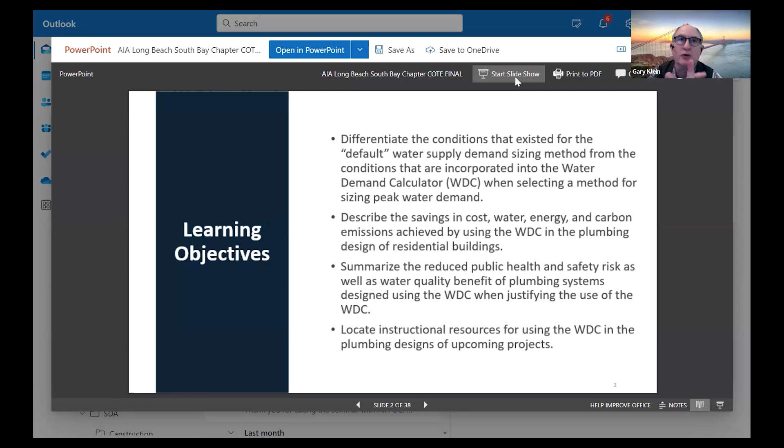Okay. So we're going to cover these topics with particular attention being paid to one exemplary project. We're going to cover the overview and problems with the existing methods in the Hunter's curve. We're going to look at the water demand calculator. We're going to talk about the benefits, and we're going to talk about codes and standards and future collaboration opportunities.

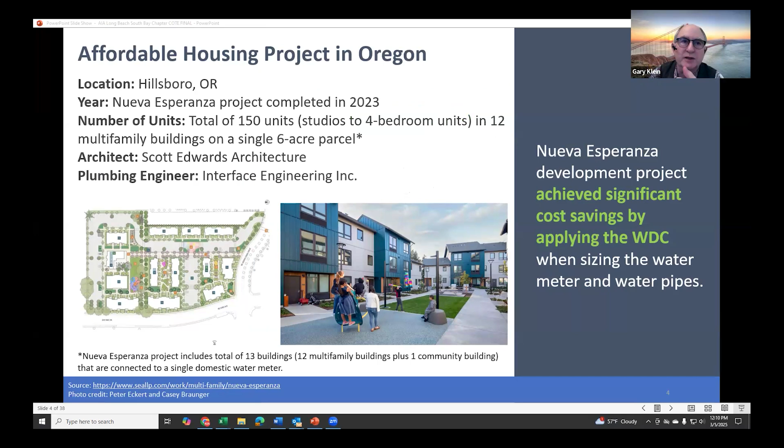This is an affordable housing project in Oregon. It's called Nueva Esperanza, and it achieves significant cost savings by applying the water demand calculator when right-sizing the meter and the water pipes, particularly the mains between the buildings. It's a garden apartment complex. So there were system development charges, as we're all familiar with here. They have similar ones in Oregon. And they were told they were going to need to use a 4-inch water meter based on normal calculations for the sizing of the water demand in the building.

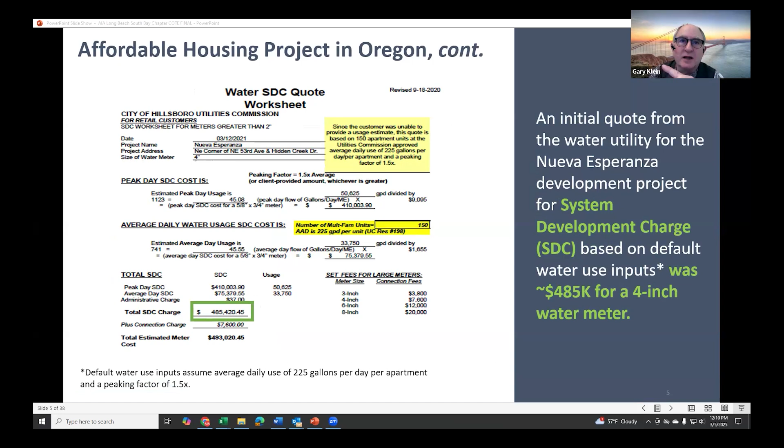So about $480,000. They came back with a 2-inch meter size and a 2-inch pipe. So their system development charges went down by $400,000 just by virtue of using the water demand calculator to give a better estimate of peak flow and therefore pipe size. That's a savings of $2,600 per apartment unit. I'd say that helps make affordable housing more affordable. What about you? It's a pretty big deal. This is a huge one. We haven't even got to the piping in the buildings. This is just at the system development charge level.

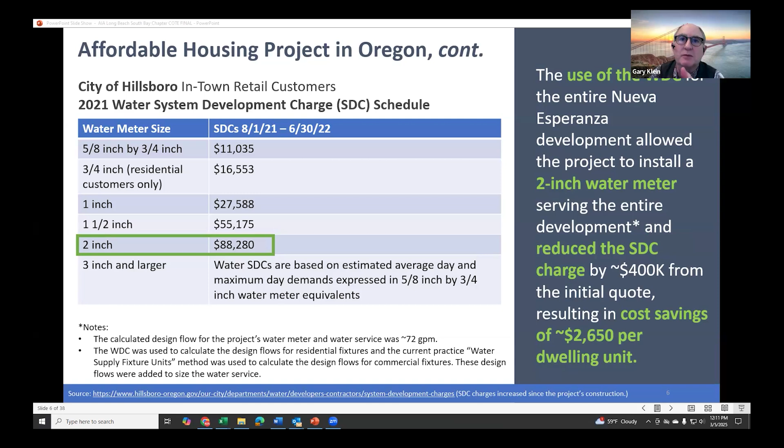So let's talk about the problems, the overview. Sizing plumbing is undergoing a major transformation. I've been working on this topic for almost 10 years now as part of my work with the Water Efficiency Standard Task Group that's formed by IAPMO. And about a decade ago, no, 15 years ago now, we received a proposal to say we ought to bring the sizing of water piping into the modern era.

The methods we use were written down in 1940 by a fellow named Roy Hunter. Some of you may know that name. He used to work with the National Bureau of Standards, which we now call NIST. And the method of sizing has not been fundamentally changed since 1940 when he published it, even though if you read his documents, he said, we really need to fix this as we get more information moving forward.

Well, in the 1990s, the federal government changed fixture flow rates for faucets and showers and toilets and urinals, and nothing flushes or flows at the rates it did back in 1940, nor are our patterns of use the same. And if you read the 4th bullet, the flow rates from the 1940s assume that every home operates like a sports stadium at halftime with people waiting in line to use the toilets and the sinks. And I'm going to suggest that doesn't happen very often anymore.

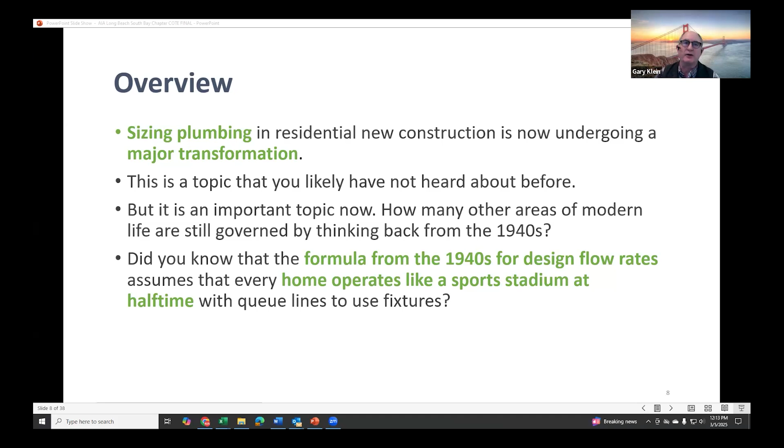And so we have lower flow rates and different patterns of use. We really ought to start looking at right-sizing the plumbing based on modern information. So reducing the volume of the water in the building's piping has many benefits. You can think of several.

There's water savings potential, particularly on the hot side. There's energy saving because you don't waste as much water waiting for hot water to arrive or when the pipes cool down. You get carbon savings in first costs and operational costs, and you get cost savings in first and operational costs too. All of these sound like a pretty good deal from a construction point of view.

So the key to remember is that volume is a combination of distance and diameter. Architects are responsible for the distance between the mechanical room and the wet rooms. The plumbing professionals have no choice but to connect the things so they don't leak. The closer we can put things together, better stacking and back-to-backing reduces the number of feet of pipe, which reduces the volume of the pipe. Reducing the volume is where all the benefits come from.

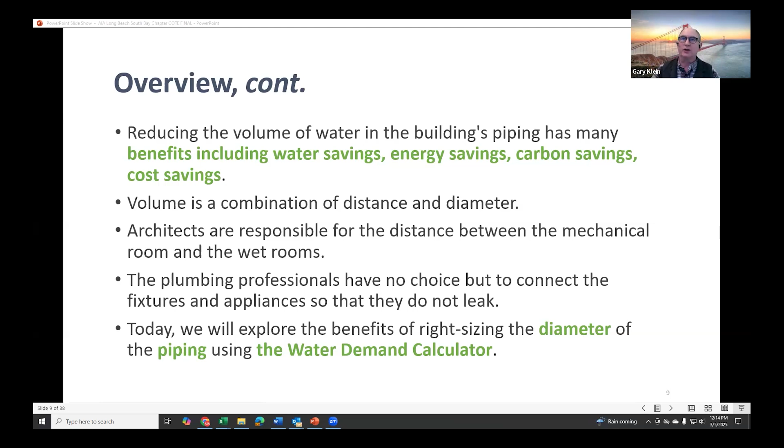So how can we reduce the diameter and still provide a margin of safety? Because we really don't know exactly how much water gets used, hot or cold, in a building in any given minute of time. This is an overview of water use over time, showing that from 1980 to 2023, there's a 50 to 75% reduction in water use for the typical residential fixtures or appliances that we see in our buildings. And the probability of simultaneous use is much, much less than we would estimate.

So I'm going to ask a question that I'd like you to answer in the chat if you can. Imagine you have a hotel with 100 rooms in it. How many showers do you think are on at the same time on their peakiest day of their year? That means every room is fully occupied. I see an answer of 12. Anybody else want to guess? I see 50. I see 40. I see 80. Cool. All over the map.

So it turns out from measured data, it's between 10 and 15 showers are on at the same time on the busiest hour of the busiest day of their year. That's 2 hotels for almost 2 years worth of data. It's not an infinite number, but boy, it's a big data set. The plumbing code assumes 80%. It doesn't happen. There's no evidence that that happens in most cases. We can create a few cases like stadiums and flushing at halftime. That's a different case, but it is not the normal case for most buildings.

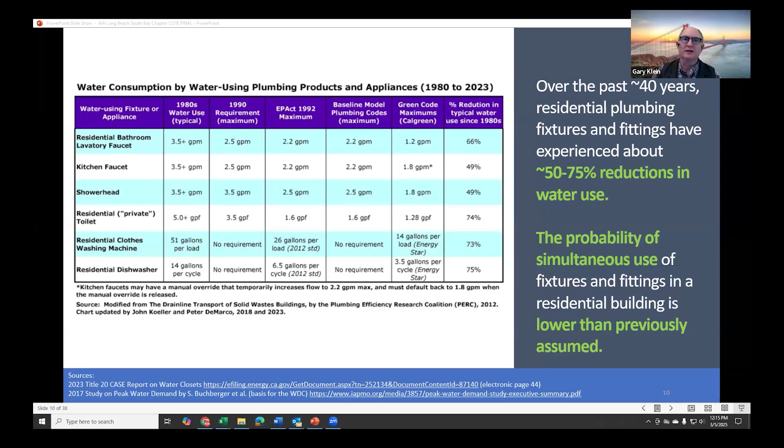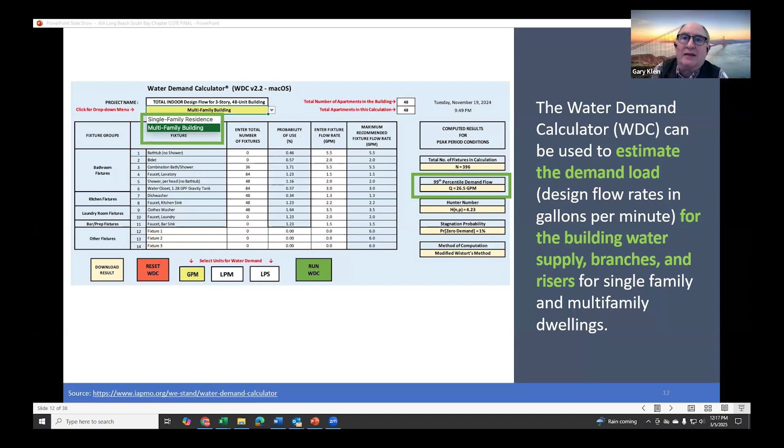And what's also telling us under the Hunter number is that only about 4 fixtures are on during the peak period that it's finding at 99th percentile peak. That's not very many out of how many total for the building? Almost 400 fixtures. 1% of the fixtures are on at the time of the peak. That's not very many. It's a very small percentage.

This is showing you 2 graphs, one a subset of the first. The standard method in our code is based on converting water supply fixture units, which are on the x-axis, to gallons per minute on the y-axis, and they follow that red line. That comes from the Uniform Plumbing Code. It's the same as in California's plumbing code. And it shows that that's the conversion line. Notice the little black dots crawling along the x-axis. Those are 20 different apartment buildings that are from all over the country, ranging in size from 8 to 384 apartments, and none of the black dots are close to the red line.

If you look in the bottom half of this image, you'll see the letters inside the dots, and you're actually able to read the letters, and you're still not very close to the red line, which is the conversion line. It's showing us that the code is overestimating the peak design flow rate by 5 to 27 times.

That's huge. If anyone does structural engineering, an oversizing of 100% is a big number. That's 2 to 1 for structural engineering. And the code is oversizing its demand estimates by 10 to 1. Why? It makes no sense.

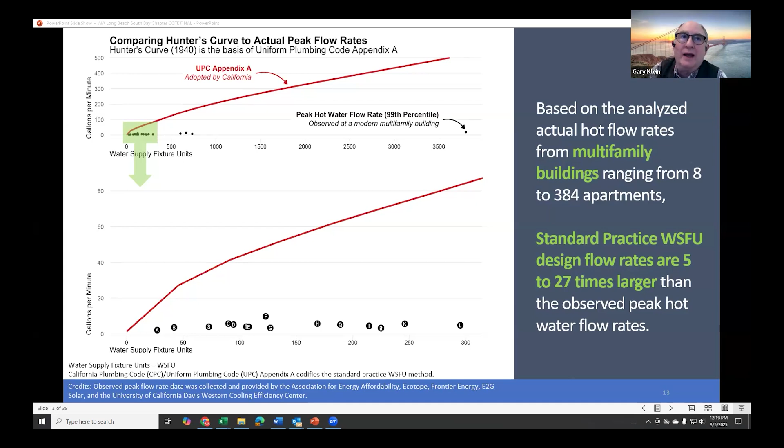So this is looking a little bit more closely at specific buildings. The black dots are the same black dots we just saw. The red crosses, the lollipops, are what the water supply fixture unit method using our current code would give us. And if you look on the far right, there are 4 numbers that go with arrows. They're too far off the chart. We just decided to tell you how big they are.

The blue lollipops, the blue crosses, are showing you the water demand calculator estimates for the peak. And with the exception of the last one on the right, they're 2 to 6 times the estimate of measured peak, the actual measured peak flow rates in these 22 buildings.

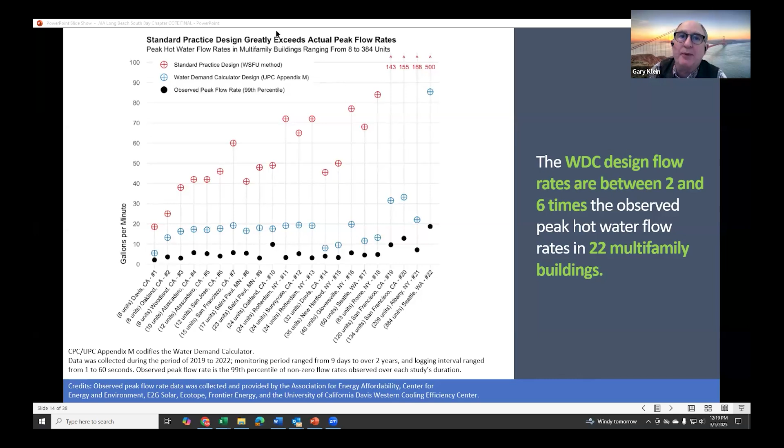It still provides a good margin of safety, and it's a much tighter approximation of what's actually happening in our buildings. This is the metadata, these 2 slides, this one and the next one, showing you how we monitored the buildings, what the monitoring periods were, the logging intervals, the times at 0 flow, and the peak gallons per minute that we actually measured. And then the California Plumbing Code Appendix M and California Plumbing Code Appendix A.

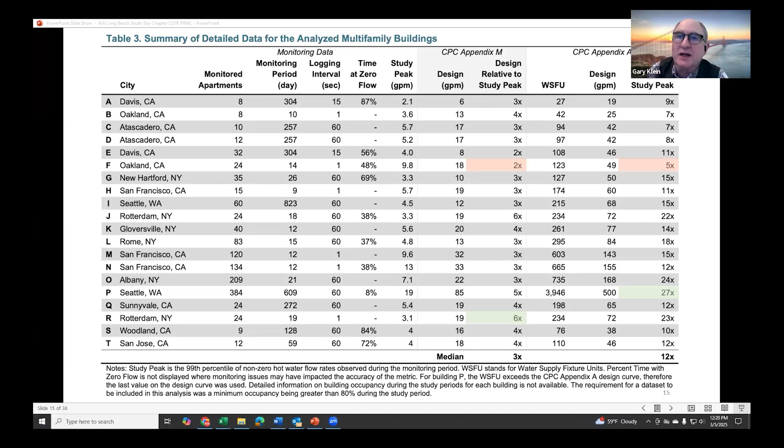Appendix M is the water demand calculator, Appendix A is the base code, and you can see the multipliers and values. This is showing you the occupancy type and the number of apartments and what was in the calculations that we used for all of this work.

Just in case you're going to ask, I work in the energy space mostly. And so when we wanted to find data about water use in buildings, I called my friends in the energy space and said, well, I can get you hot water numbers. So all of the data you're seeing here is about hot water use in these apartment buildings.

When you add on toilets and mixed flows for other things, nothing changes. We've got enough buildings to show pretty clear evidence that the patterns remain the same. The total for the whole building is a bit bigger than it is for hot water, but it's not double, it's 10, 15% more. It's not a big deal.

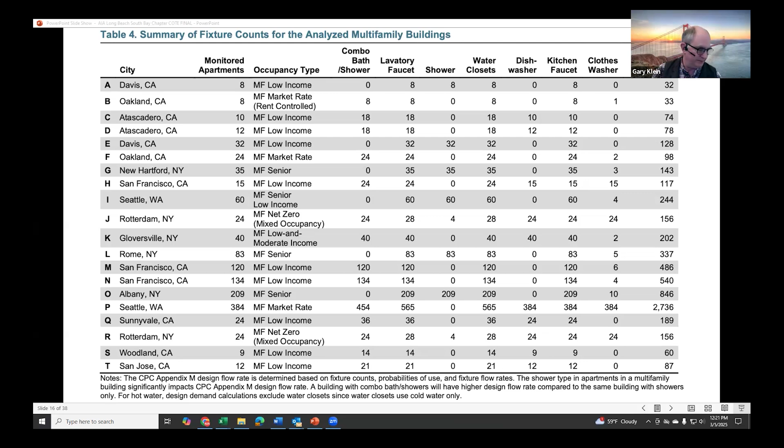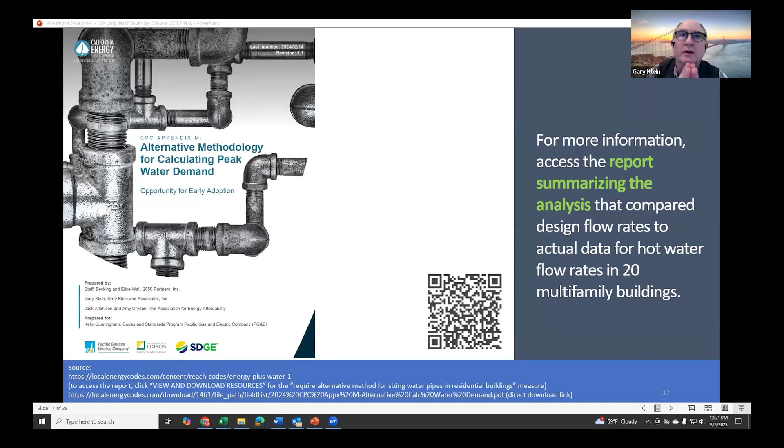Let's talk about the benefits.

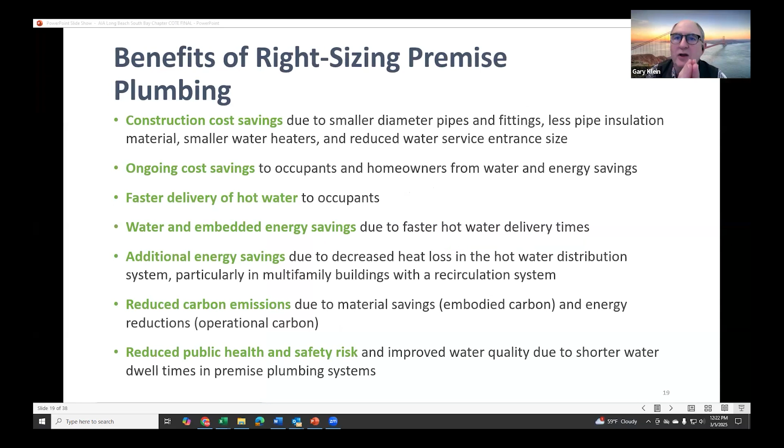You can keep clicking. So there's construction cost savings. There's ongoing cost savings. There's faster delivery of hot water to occupants. There's water and embedded energy savings. There's additional energy savings due to heat loss in the hot water distribution system. Reduced carbon emissions for embodied and operational. And by reducing the volume of water in the building, you have shorter dwell times, and that's a huge win for pathogen management in our plumbing systems.

That's a big deal. It turns out, in approximate terms, if you can reduce the diameter of the pipe one size in the building, you cut the water volume in the building roughly in half. That means for the same use, your turnover is twice as fast. Turnover twice as fast means you're bringing in new water from the municipality, which has been protected with some form of disinfectant, more quickly for any given use rate. That's what's protecting health and safety. And if you ever have to flush the lines because of other concerns, you have half as much water to flush to clear the line out and make it safe again.

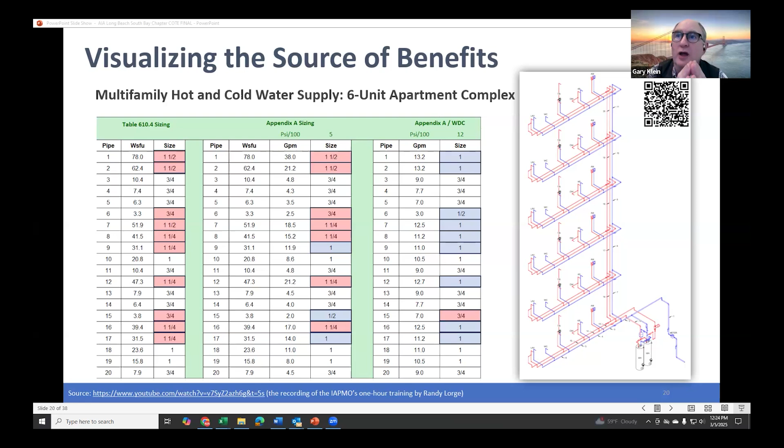So we've done some estimates of cost savings. I've worked on some projects where I have real numbers, and I'm happy to discuss them. But this is an estimate from 2022 - we haven't updated it, so the savings are just bigger now because costs are higher. We found $600 to $1,200 per dwelling unit of reduction in first costs by virtue of using the water demand calculator, and a bunch of that's dependent on the water connection fee. This was in Seattle - depends which part of town you built in, how much you get to save. That's a big difference per apartment unit. As we talked about for Nueces Esperanza at the beginning, their system development charges went down $400,000. That doesn't include the savings in pipe fittings and water heaters inside the buildings. So it's a big deal - it's really worth working on.

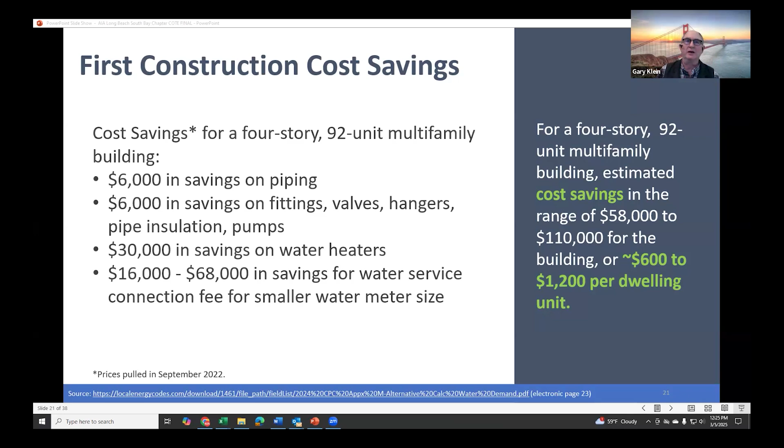So we have found from our research that water and energy savings range from 200 to 1,600 gallons per dwelling unit for the buildings we considered. I'll come back to these in just a second. Natural gas savings range from 3 to 8 therms per dwelling unit for different building types we looked at. The water and energy savings turn out to be highly dependent on the plumbing configuration and the fixture use patterns, so I'll give you a couple of examples.

Do you know anyone who waits a long time to get hot water somewhere in their house after they turn on a tap? You can raise your virtual hands - I'm pretty sure lots of us. Does anybody wait at least 15 seconds to get hot water somewhere in their house? Yeah, lots of people. Okay, does anybody wait 30 seconds or more? How about a minute or more? Do you realize the American Society of Plumbing Engineers says 10 seconds is all you should wait? And most of us wait much longer than that.

Well, I'm going to give you a clue. Part of the wait is architectural decisions, and part of the wait is the diameter of the pipe. I believe I'm talking with architects today, so I want to pay a bit of attention to architectural compactness. We don't have slides particularly on this question, but it's really important. It seems to me that in many buildings, particularly single-family detached homes, the water heater is located in a garage - we live in California, we don't get basements. And if we're lucky, that water heater is next to the wall of the house, not at the front of the garage where the door is. So if it's located there, I'd take a pretty good guess that either the primary bathroom or the kitchen is diagonally opposite the water heater somewhere on that floor plan. I don't care if it's one story or two, but I see an awful lot of floor plans that look like that. That distance has to be overcome every time you turn on the tap at that location to get hot water there.

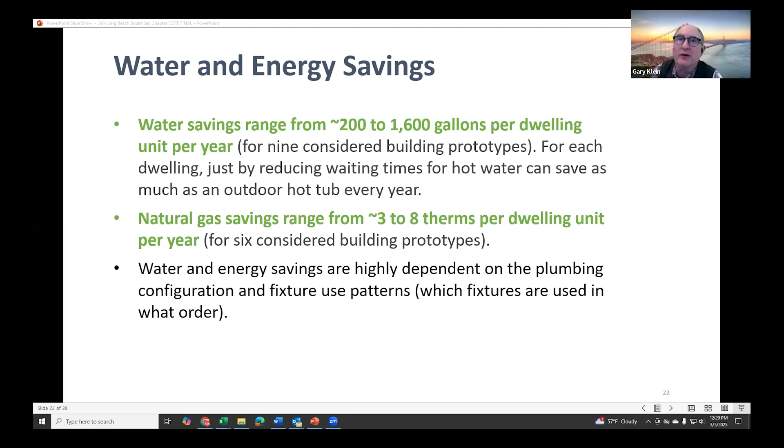So this is looking at how we got to our savings estimates. I don't think I want to spend a lot of time reviewing it here today, but we can go into detail if you'd like. We have single-family dwelling units, and I see a small typo in single family. We want to fix that, Carrie.

The other estimates are for multifamily buildings, where we looked at a bunch of different prototypes and did the analysis. It varies a lot depending on the configuration of the plumbing and which fixture is at the far end of the system. Sinks get used much more often each day than showers do, so every time the sink cools off, the branch to the sink is going to cool off at least once every hour. Same for showers, which cool off within an hour after you're done. So the patterns of use matter, and how much savings you can estimate matters.

We only counted kitchen sinks and showers for the water saving estimates. A lot of the time when I need to rinse my hands or wash a peach, I just use whatever temperature comes out of the faucet, because I'm not looking for water hot enough to shower in or wash dishes in, I'm just looking for some water to make a rinse. So we only counted two key fixtures in our estimates.

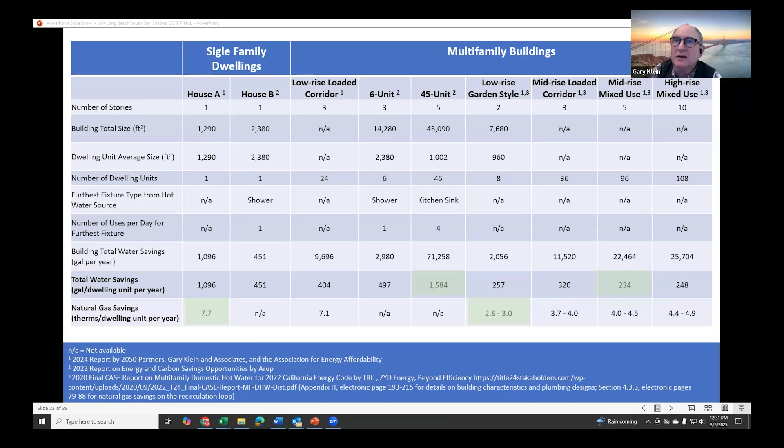There are carbon savings too. IAPMO has done a report, and Arup was the engineering firm that did the work. It shows you save a bunch of embodied carbon in terms of the way the building is built. The second bullet also found that booster pump savings in high-rise buildings are huge, 73 to 84%, because you're not trying to boost as much water up to the top of the building. You still have to overcome the vertical height of pressure, but you don't have to move as much water to do it. It's a big deal.

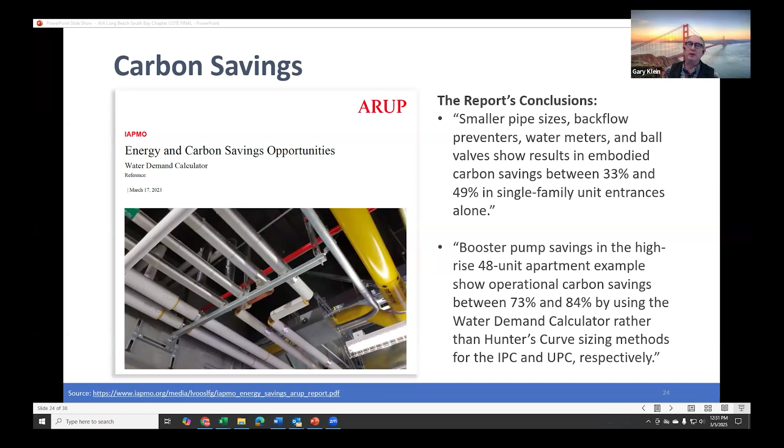Here's some resources on the benefits. There are several reports, all publicly available. The links are down in the chat at the bottom of the presentation, and I highly recommend if you want to learn more, you should go read all about them. There's a lot here to deal with.

And that QR code would be really helpful, I would take a picture of that and use it. It gets to IAPMO's webpage on the water demand calculator resources, and it will get you lots and lots of information to help support your understanding of this.

All right, let's talk about the water demand calculator in codes and standards. The blue items on the map are where the water demand calculator has been adopted, mostly in uniform plumbing code states, because that's who adopts the uniform plumbing code. The water demand calculator is Appendix M in the uniform plumbing code, but it's also referenced in ASPE and WE-Stand documents. And I know there's a dot or two in Colorado, because it's a home rule state, so each city gets to pick its own codes, and some jurisdictions there have already adopted the water demand calculator into their plumbing codes.

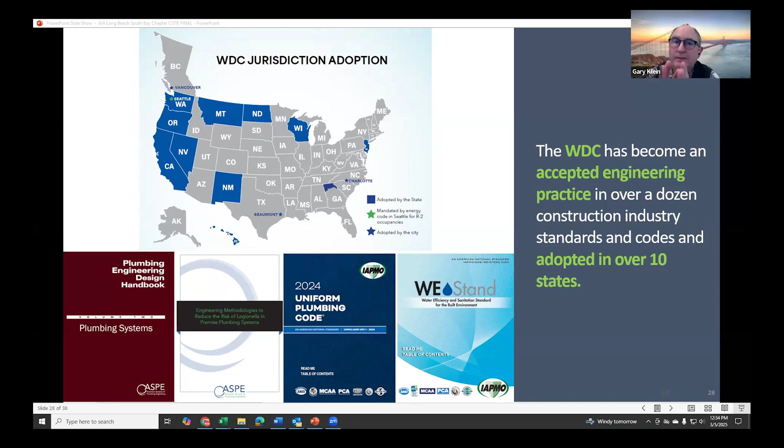This is what's true in California. It became effective July 1st of last year based on our efforts to amend the code in the state. It applies to new residential construction, meaning single and multifamily buildings that look like apartment buildings, even dormitories that look like apartments.

You can use it now for renovation or adaptive reuse projects. One of the big wins is that if you don't have to change the pipe if you want to convert an office building that's got a 3-inch pipe coming into it, because it's an office building, and you want to convert that to apartments, you might not have to change that pipe or the meter size.

You can live with what's there. You'd probably go to a smaller meter, but you wouldn't need to replace the pipe from the municipality into the building, which is a very expensive proposition. And you'd be able to use right-sizing inside the building to get the right dimensions for all the water use fixtures in the building.

So chapter 6 on the far left points now to Appendix M. It didn't used to. Appendix A, below on the left column, tells you there's an exception for applicable fixtures. You may use Appendix M values, shown in the right-hand column of this sheet. They are adjusted for California because California has its own rules for water use efficiency, mostly for lavatory faucets, shower heads, and kitchen faucets. Everything else remains the same as the maximum flow rates.

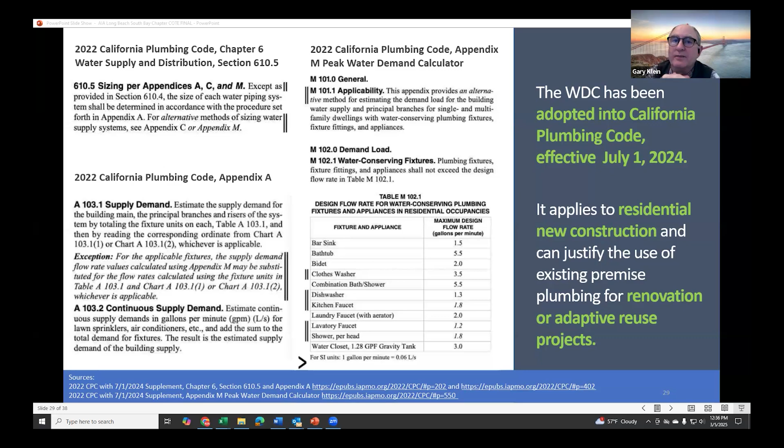This is what's in the 2025 California Energy Code. This will take effect in January. It is part of the prescriptive requirement, so it's the base by which calculations will be compared. Hot water piping shall be sized in accordance with California Plumbing Code Appendix M. It doesn't say you have to use it in the building, but it's the basis of comparison for the energy designs that you're putting forward.

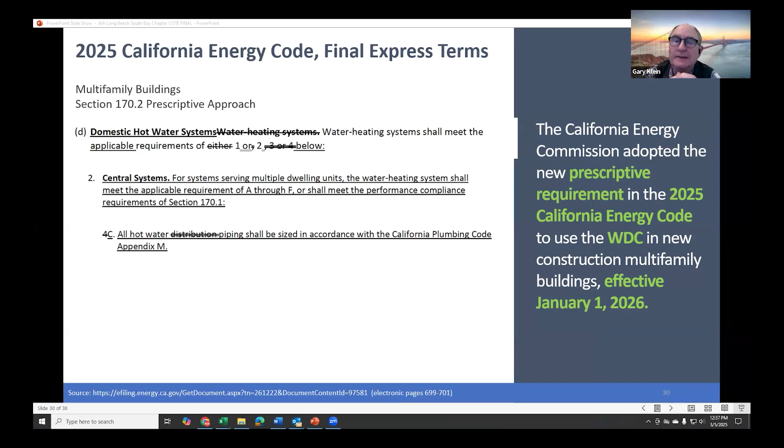To address this question, we actually have a pressure testing lab in Madison, Wisconsin. We were able to run a project from Portland, Oregon for a 10-story apartment building, where we actually built the plumbing from the service entrance all the way to the furthest fixture on the top floor, the hydraulically most remote fixture, in an apartment.

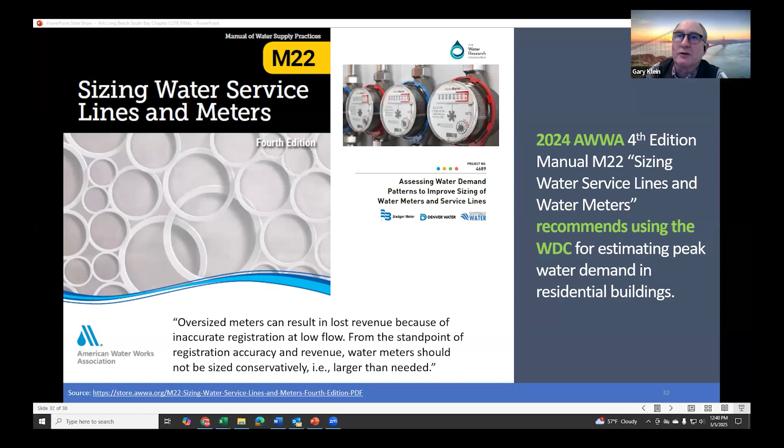The water demand calculator doesn't size the pipe. It does a better estimate of peak flow rate for the key fixtures in question. Methodology in the code is still followed by the engineers to size the pipe, but instead of 3 and 4 inch pipe, we're ending up with 1 1/4 to 2 inch pipe for the main service entrance for an awful lot of buildings. That's a big, big change.

Collaboration opportunities moving forward. I suspect that many of you work on projects that are not residential. Long-term care, commercial, hospitality, dormitories, hotels, you name it, lots of things that are not strictly residential.

IAPMO is now working on a version of the calculator for each of these other occupancy types. To the extent you have access to buildings and can help us get data from buildings at the flow meter data stuff that we talked about earlier, we will be able to incorporate that information into a commercial version of the calculator to cover initially all other occupancies than residential, but eventually specific to each occupancy type.

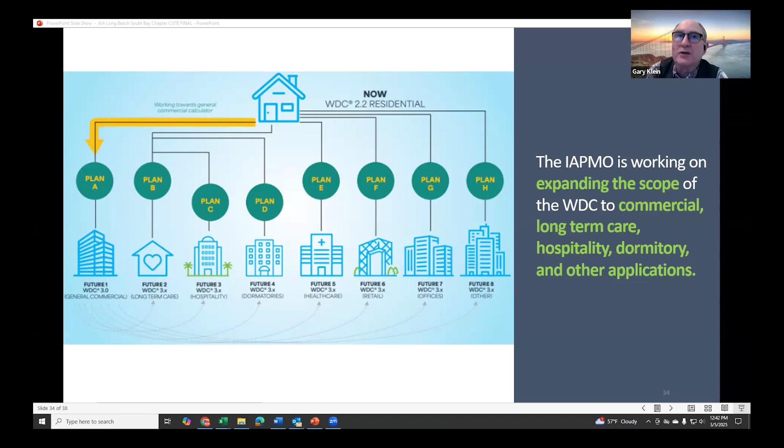I can make a pretty good case that long-term care in healthcare is different than hospitals or urgent care because there's different things in the building. So we ultimately want to have a calculator that's tuned to each of the building types we have. So we need your help to get there. The sooner we get to the number of buildings we need, the sooner we'll have the calculator ready.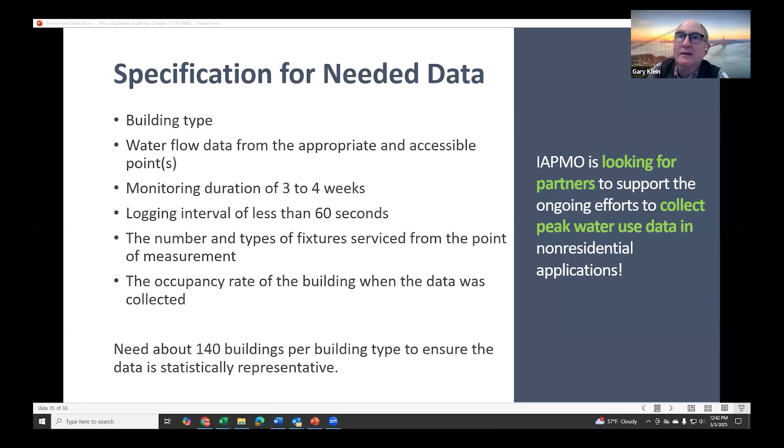If you've got tall buildings, one of the best things we can do is to put a meter on the booster pumps, because the booster pumps are telling us what's going on for pretty much the whole building every minute of the day. We just need to track the data at finer time intervals. And it turns out we don't need that many buildings, but we need 140 or so of each type in order to make a tuned calculator. We're getting there, but we need your help to get there quicker.

So what can you do? Well, let's see about using it on your next projects. You need to opt in, so you have to ask for alternate methods and means. I would be happy to continue this kind of conversation in small groups with you and your teams of projects so that you can learn specifically for each project what to do.

You should share this presentation with your teams, go over it, have a lunch and learn. You can invite me to listen in. Those are the sorts of things we need to do to get projects moving forward all over the state.

And some of you are going to tell me about problems you have dealing with the city of LA, and we'll cover those in Q&A. This is all viable throughout the state.

So then you have to ask your plumbing engineers to attend future trainings, because all we've done today is give you an overview. IAPMO's got lots of resources on their website. They're willing to help to apply to specific projects, as am I. And we just need to start sharing it around and move forward.

I would be looking at your projects that are 6 months or a year out. The ones that are already in the books for next Tuesday are a little late for this. But if you've got a willing client, happy to help you figure out how to do it.

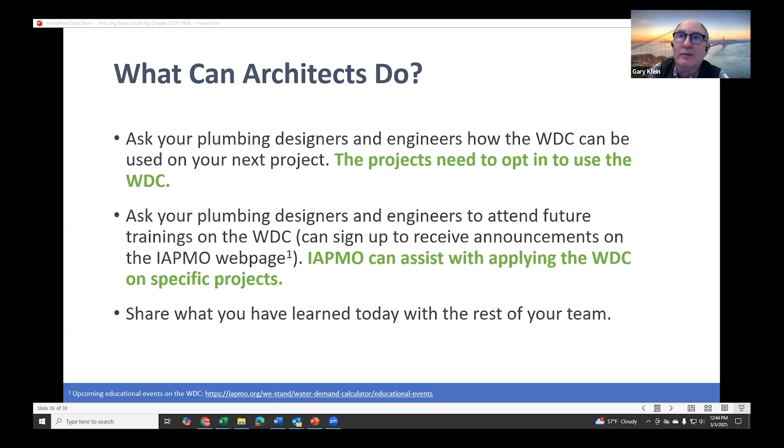All right, I think we should open it up for Q&A.